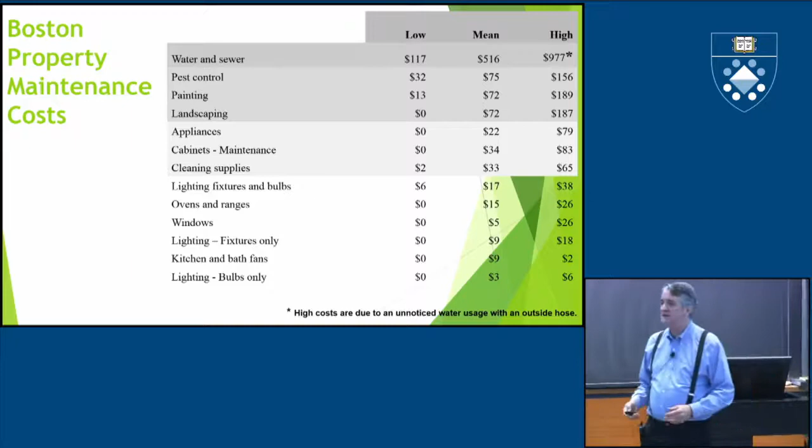And whenever I'm speaking to members of the Republican National Committee, they say, well that's because all these people get all their energy for free. No, it isn't that at all. It has nothing to do with it.

In 1996, I looked at 400 - and I know this seems like a long time ago, but these are still real figures that are pretty close today. In 1996, I looked at low-income buildings across New York State that were multifamily, and they were being improved by the New York State Weatherization Assistance Program.

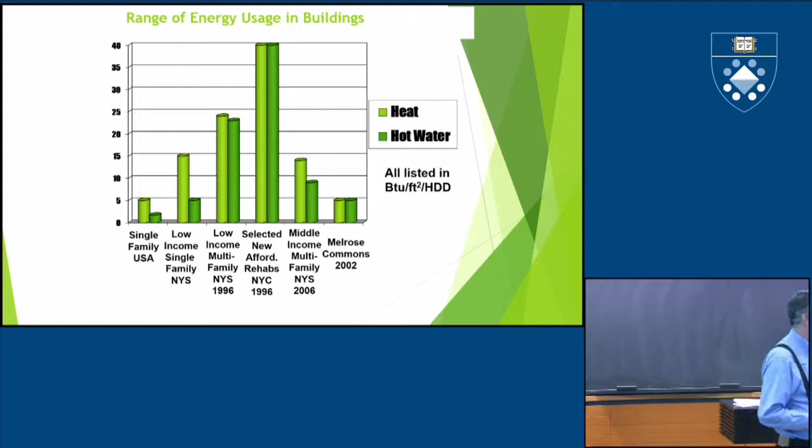A major reason for this is that architects and engineers, as they were building the building, were told by various government entities that they needed to value engineer the buildings. Value engineering means getting something out of the building that's more effective for a better price, but when a government entity says value engineering, they mean take stuff out. So the buildings were under-insulated, there were no controls on the radiators, the boilers were as cheap as could possibly be, and had no ability to turn back the heat at night. That's just some of the things that are wrong.

Today, in middle-income multifamily buildings, the 1, 2, 3, 4 bar over, I find their energy use is about 14 BTUs per square foot per heating degree day, and they pay about 60% for heat and 40% of their money for hot water.

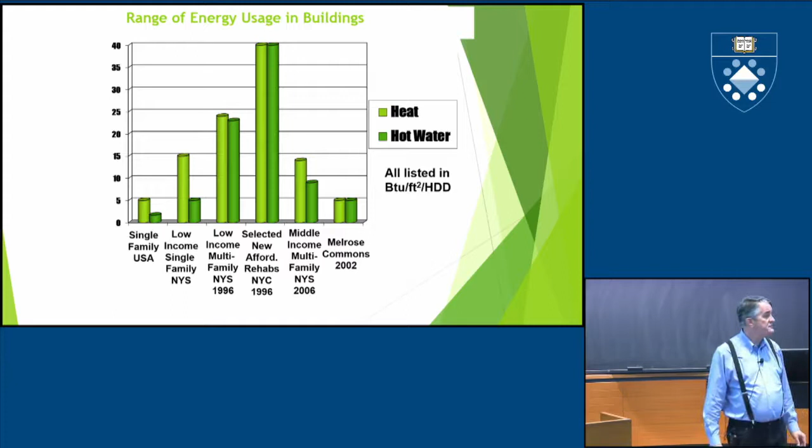But in 2002, I worked with a developer whose family has been in the business for 30 years, and we convinced him to change some things that he did in his building. He built 70 units of affordable housing in the middle of the South Bronx called Melrose Commons. They performed at 5 BTUs per square foot per heating degree day. The builder said they cost him an average of $1.36 per square foot more.

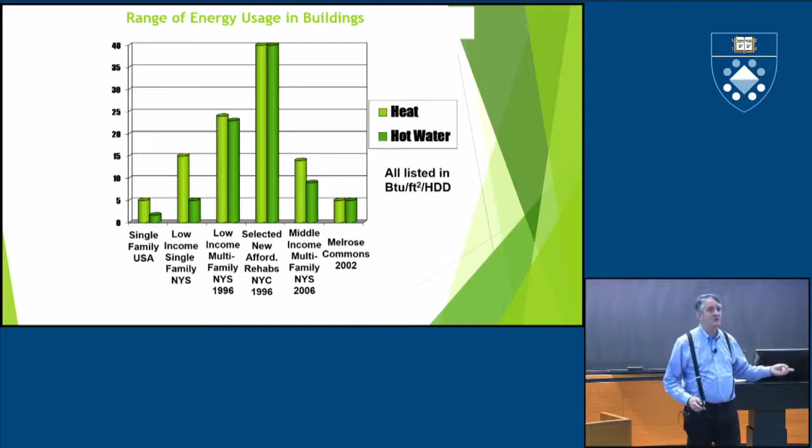This is stuff where logic is really simple. If you look at this chart as BTUs per square foot per heating degree day, and then go back to what the cost of gas was then, this is a difference of between under $1 and over $7 a square foot. This is very common in multifamily buildings - owners don't see how much their buildings cost. As long as the buildings are profitable, they don't understand the cash flow from saving energy.

What does he think I can do for him? So owners actually don't look at this stuff.

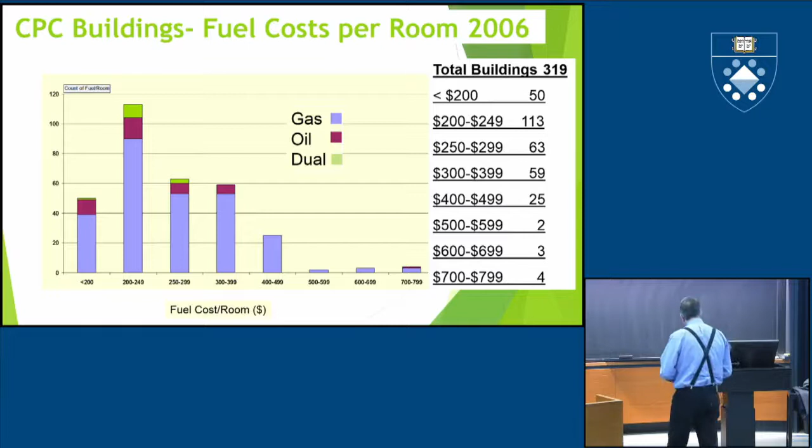This is common because banks have a practice of taking numbers using the PFA method. Would you engineers say what the PFA method is? Plucked from air. That's correct - it's just a wild guess.

These are buildings that are going to fail. Fortunately, in year 10, they brought me in to do a detailed energy analysis of the building, and we've cut the energy use in the building by about 40%.

I've met with people in the New York City mayor's office doing a program for cash flow efficiency, energy efficiency for multifamily buildings, and I said, where's water? They said, oh, we're not doing water. I'm like, water's the biggest cost to building owners, not only in New York City, but in Boston, in Hartford. I actually don't know New Haven numbers that well.

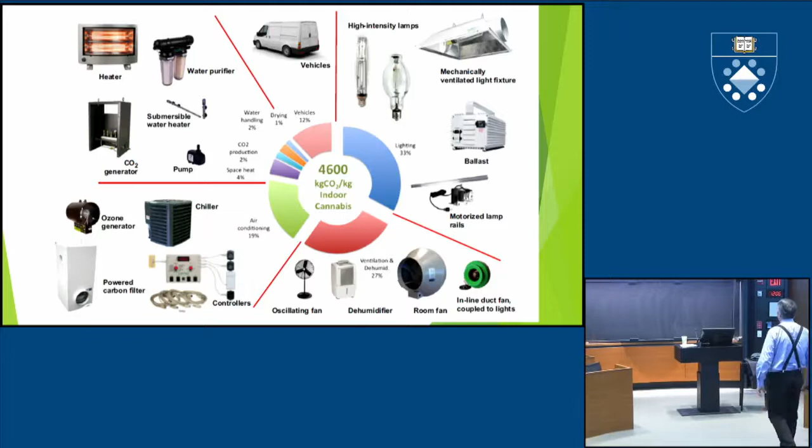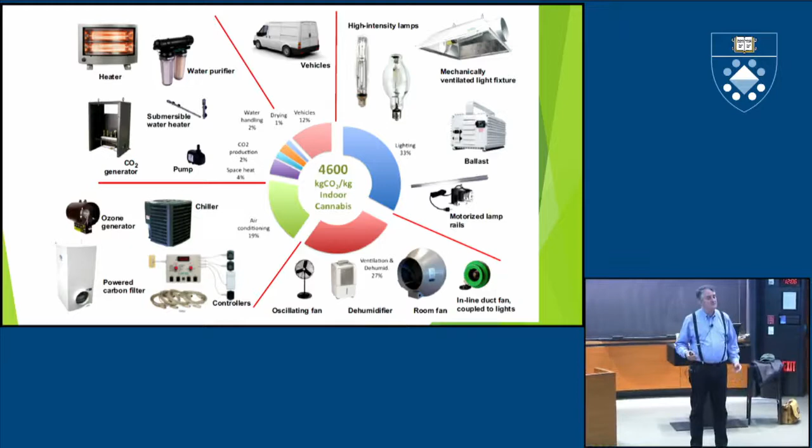Marijuana takes a lot of pumps and air and stuff. I actually talked to a marijuana manufacturer 3 months ago and suggested he change his lighting from fluorescent to LED. And this guy went into this detailed scientific stuff about why LED lights don't work well enough, and they have to get a different spectrum for LED. Anyway, that's pot growing. We don't have to talk about that.

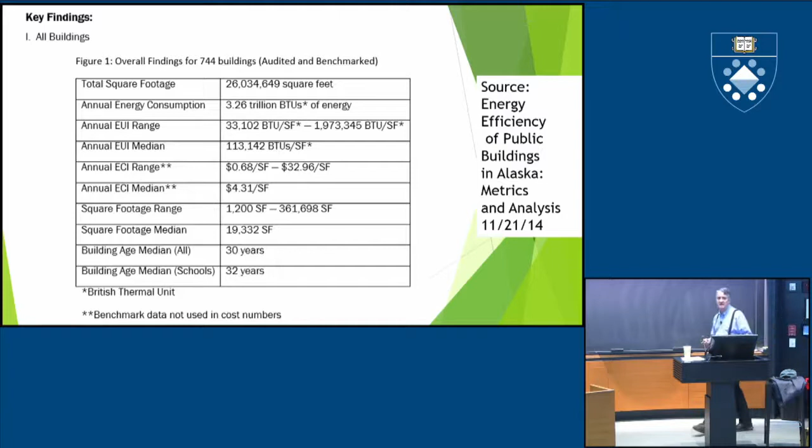Well, if heating is so expensive in Alaska, couldn't we fix it somehow? Well, if they look at it, they find out that the space heat loss by component for all audited buildings - that big blue chart again - is ventilation and air leakage. The buildings leak. They need to be caulked, and the ventilation needs to be fixed.

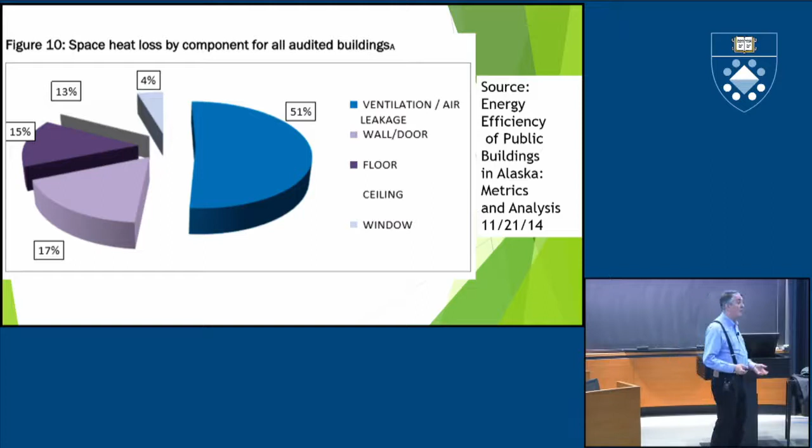It's crazy - it's the same thing that's wrong with all of our buildings. Our buildings leak, we don't make them tighter. Our buildings are ventilated poorly or too much, and we don't balance them. I walk into thousands and thousands of buildings in my career, and technical inefficiency is exactly the same in all of them.

First off, tighten the buildings - increase air sealing and fire stopping. If you say you're going to air seal a building, building owners get scared that their tenants are going to suffocate. But if you tell them you're going to fire stop the building, it's the same thing. And it meets code, and it stops fire from spreading.

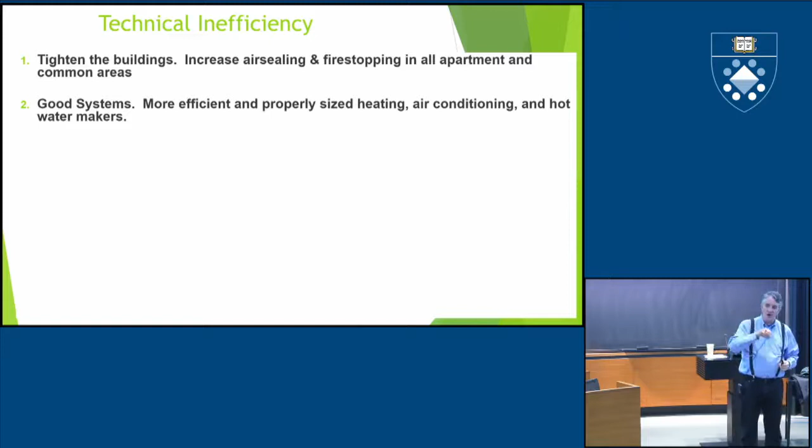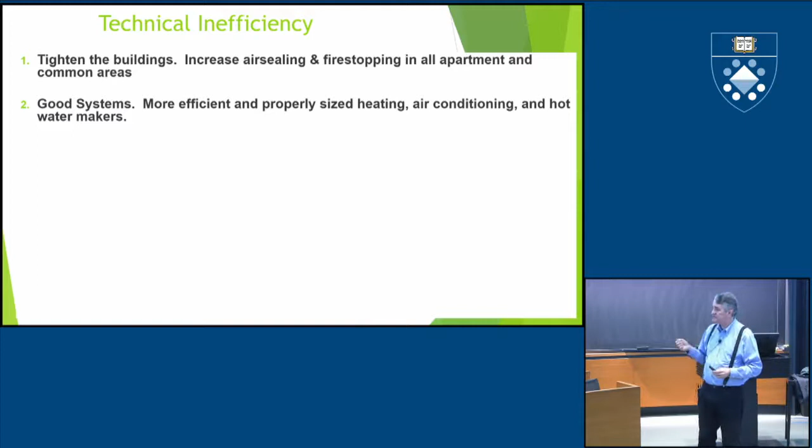In every place in buildings, good systems - why do I hire an engineer, nothing against you engineers, to write a specification for a boiler replacement or air conditioning replacement that's 2 inches thick? The first inch tells me every single code since the beginning of time. The bottom half tells me everything the engineer and architect are not responsible for. And in the center, there's one piece that draws the basement, shows a box and a circle, and says put boiler here, put hot water heater here, replace with same. That's like taking your iPhone and changing it into a dial phone. It's backwards - don't replace with same.

Upgrade the building controls. If you walk by a building and all the windows are open, the building's overheated, so you have to fix that.

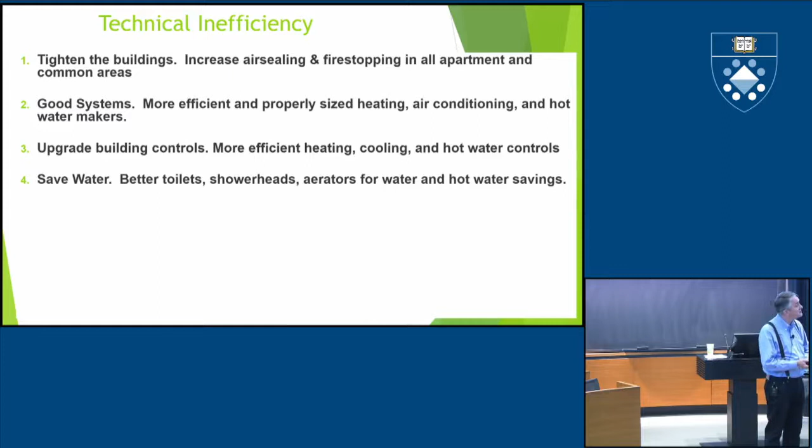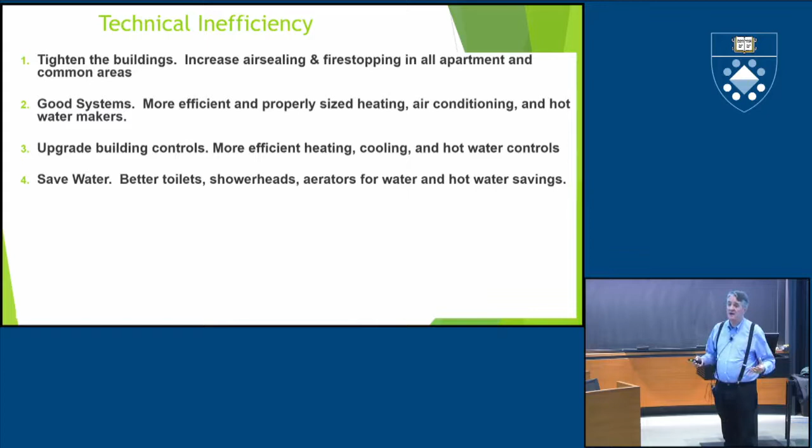Save water - I was very impressed. I went into the bathroom here, and the bathroom sinks are running at a little under a gallon a minute. That's really good - most bathroom sinks in most LEED buildings run at 2.5 gallons a minute, which typically makes water splash on the floor and in your face. Shower heads are 5 gallons a minute - it's like the water's all over the place. I'm a big guy, and I can't get 5 gallons a minute on me when I'm in the shower no matter what. We catastrophically waste water.

Toilets are the big waster. Fix the ventilation systems - they're big, they suck a lot of air out of the building. On the bottom floor of an apartment building, they draw 7 cubic feet per minute; on the top, they draw 140. We want to balance them at about 35. There's an easy way to do that.

Brighter spaces - let's get better light. The guys came in here today to show me this space. There's mostly LED lights in here, but there's halogens where they don't need to be, and the lights aren't dimmable. What the heck? This is a performance space - this should be a little more controllable.

And I love that this building has a lot of daylighting. That's very nice. I don't know if the exterior glass is high efficiency, but there's a lot of daylighting here.

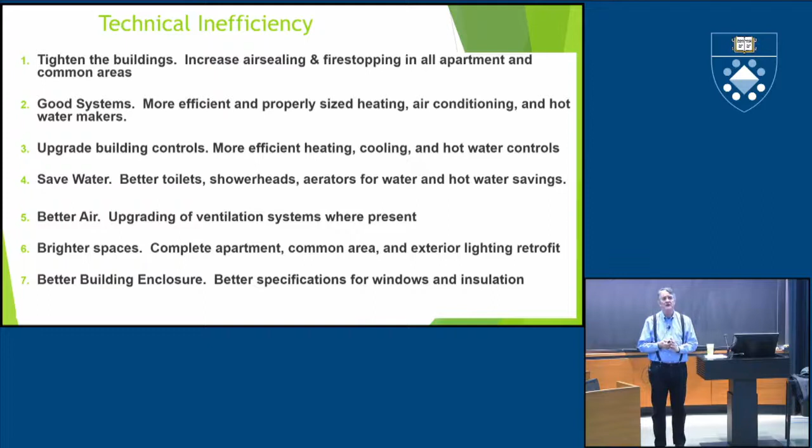Better building enclosures. Specify better windows and insulation. You can't just say to insulation, place fiberglass in walls. No, you have to have an actual way how to do it.

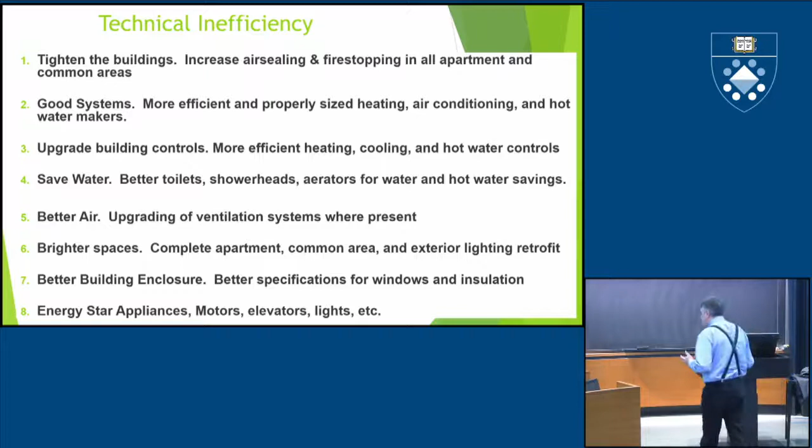And this is the easy thing, Energy Star appliances, motors, elevators, and lights, but there's 2 things that are even more difficult to get done, and this is psychology-related stuff.

Owners don't get help from building professionals. They listen to their cousin Vinny before they listen to anyone. And this is a big mistake. They listen to a contractor.

Windows will save you 40%. Let me explain something to you. Unless a building doesn't have windows, windows won't save you 40%. I've never seen a job where windows saved more than 5%. Okay? So you need help.

Talk to people, and get everybody together in the same room. The super, the manager, everybody else. And then talk to your peers that can help. Start looking at the programs before you do this big retrofit or before you build a new building. Get the team together. Where is the money available? What money can I get to do this?

Okay, now move. So when you talk to building owners and decision makers, if you want to really convince them of something, take them outside their building. Walk them around. Ask them to pretend they don't own or manage it.

And they'll suddenly see open windows in their building. And they'll say, those stupid tenants. It's like, it's not the stupid tenants, it's the stupid owner. You're overheating the building, and that's the only way they can turn it off.

Look around and point stuff out to them. Thank you for that. And what's that? Thanks. Oh, now the building owner in the crowd is like, hey, I should really do this.

And all owners don't speak that way, I'm sorry. And I hate the expression think outside the box, but I was with an energy service company the other day, and all they wanted to do is the same old thing. And I said, we can do something really easy, and it'll be cheaper. We can change, I won't get into the technical stuff, but they were like, wow, that is a lot easier.

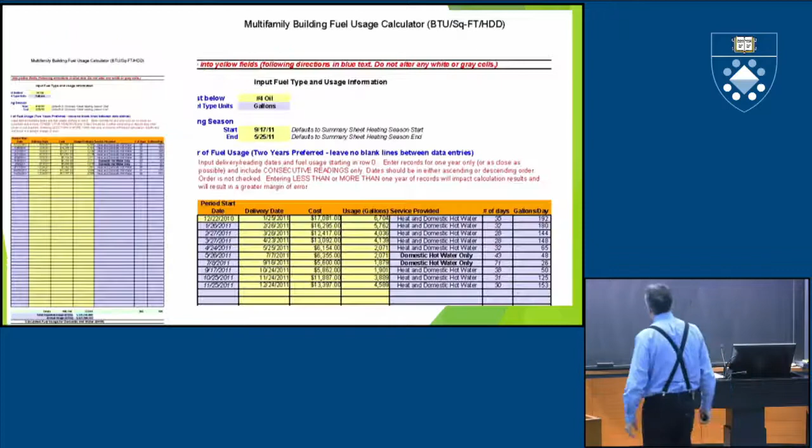Make it easier on me, I can make it easier on the owners. So in this very blurry graph that people don't like, we entered the fuel usage in the building. This is gas or oil. We entered the electric usage in the building.

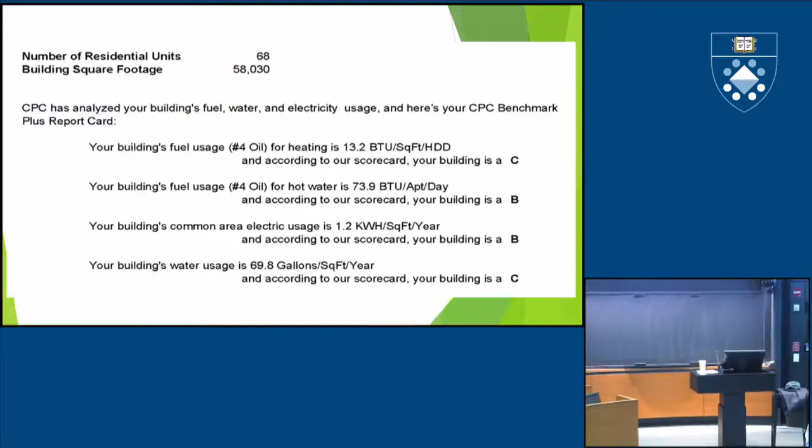We entered the water use in the building, and out popped our fancy little spreadsheet comparing it to every other building. Your building's fuel usage for heating is a C. Your building's oil usage for hot water is a B. Your building's common area electric use is a B. Your building's water use—we gave owners report cards.

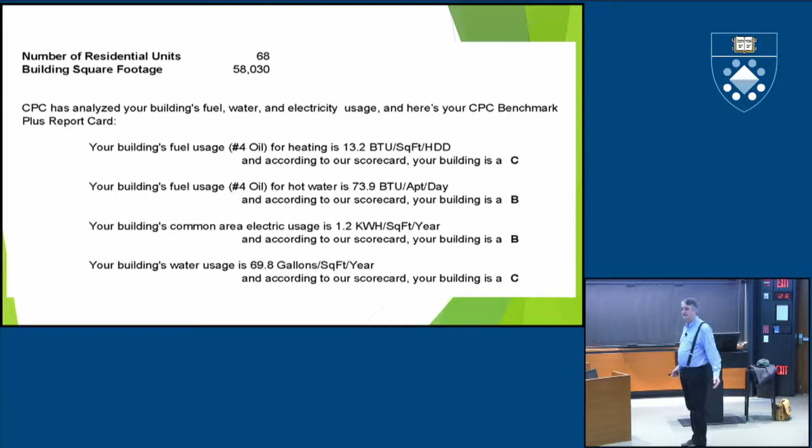Buildings that are retrofitted for energy efficiency as part of refinancing can save energy if we target excessive usage and retrofit accordingly. Why don't we do this as part of a retrofit? Why don't we do this as part of refinancing? When we're refinancing the debt on any building, why don't we say, what are the big energy costs and can we reduce them? But the problem is bankers say energy costs are going to go up 3% per year in every building.

I took a commercial banking class at NYU, one of your sister organizations, and a banker with 40 years of experience—I asked him, is it possible that while refinancing the debt on the building, you could retrofit it so it uses less energy? And to a classroom of 30 people, he said, no. It's not humanly possible to save energy in buildings, if you're a banker. Frightening. This is frightening.

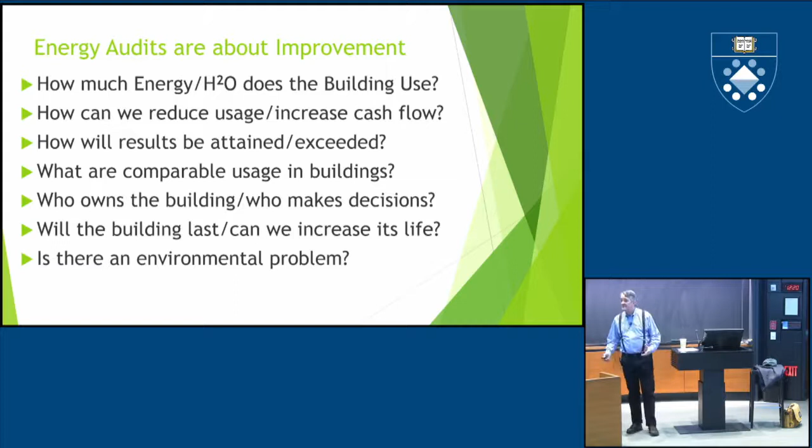If you want to get kicked out of a banker's office, tell them, you just don't understand this—you're doing a retrofit in a building, it's a deep energy retrofit, it's LEED, it's Energy Star, it's Passive House, it's green, I'm an expert.

We did a blower door analysis in the building at CFM 50. If you know what that means, that tells you how much the building leaks. We're dense packing the walls.

These are all things that scare people. Oh, we're air sealing the building in the attic. Yeah, a banker thinks you're going to suffocate the clients. This is really good. Or tell them we're doing a deep energy retrofit of the building, adding 4 inches of exterior insulation. Or maybe we're dense blowing the walls. We're moving a much smaller boiler to the roof and making it a condensing boiler. We're air sealing the apartments and the roof cavity, and we're reducing the water flow in the toilets, showers, and sinks.

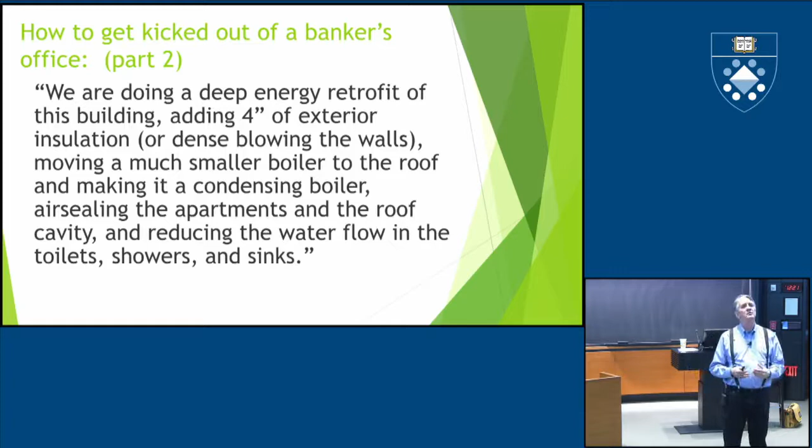And the response from the banker is going to be this. They don't want any technical terms like that. They don't want that - the guy that owns buildings over here is shaking his head, yeah, my owner said the bank has said that to me.

But if you break it down and just say, we're refinancing the debt on the building, we're upgrading the fire stopping throughout the building - oh, it's not air sealing, it's fire stopping. We're replacing the wall and roof insulation that has surpassed its useful life. Now you're talking to them.

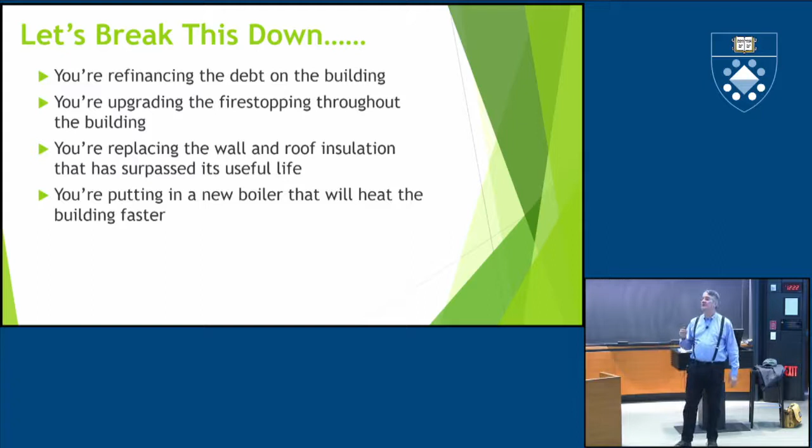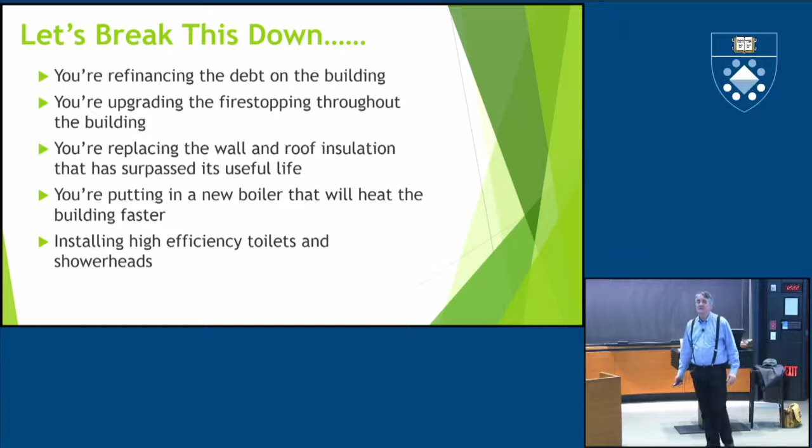We're putting in a new boiler that will heat the building faster. Don't say high performance, don't say condensing, don't say smaller. Just tell them, simple. And we're installing high efficiency toilets and shower heads. High efficiency, that's all. And we have plans, and we have specs, and we have an architect, and we have an engineer, we have a project manager, and we have 3 bids. Bankers love you. They love you then, as long as you talk their language to them.

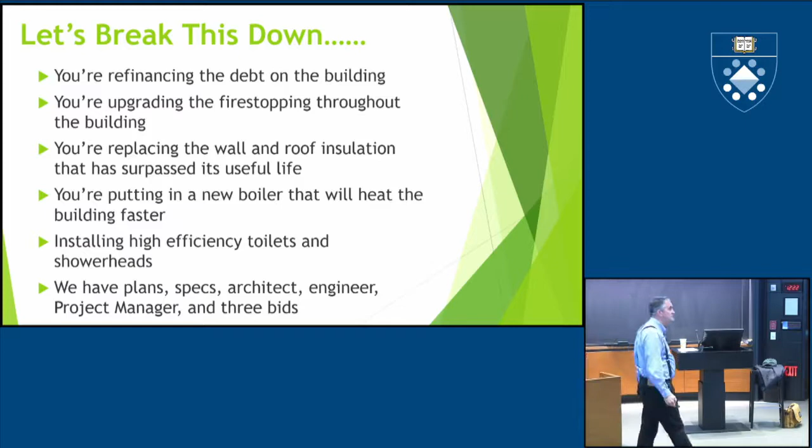Well, I'm going to run through the economics of doing this. So if you have a 20-unit building that's got $1,000 a month rent, that building pulls in $240,000 a year. But the expenses will be about $4,500 per unit. The taxes will be $2,500 a unit. The total expenses are $140,000. That means the net operating income, or NOI, is $100,000 because 240 minus 140 is $100,000. Okay, so there's your net operating income.

But the property mortgage is currently $1.2 million. If you look at the debt coverage ratio, you take the $100,000, you divide it by 1.25, and they're able to borrow $80,000 a year. Divide that by 12, it's about $6,500 monthly payment. That's a 30-year loan at 5%. Cash flow is about $20,000 per year. Okay, these are all up on the web afterwards, but I just want to run through them.

But underwrite the savings into the first mortgage. The expenses are $90,000, say 35% are for utilities. Project 20% savings - that makes an additional monthly payment of $525. You add that to the 30-year first mortgage at 5%. That's $98,000. It's very simple. It blends things in, and you have better cash flow.

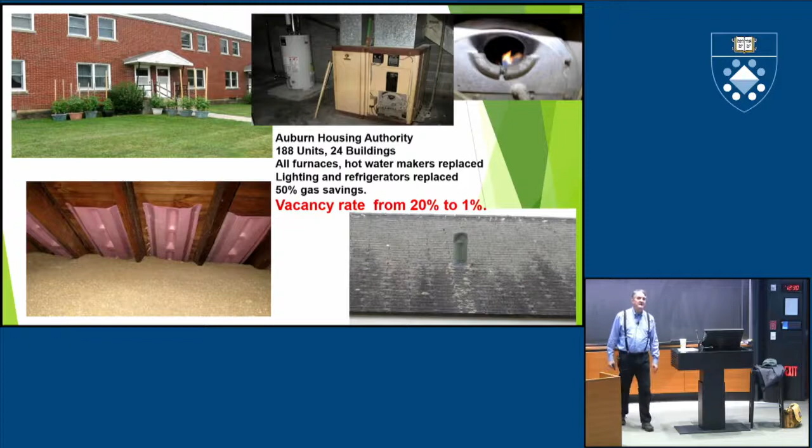This is the Auburn Housing Authority. It's 188 units, 24 buildings. Those of you that have studied architecture can see from the buildings on the upper left-hand corner, this is called Early Modern Eisenhower Bomb Shelter. It's very prominent architecture from the 50s and 60s.

We put in new furnaces, new hot water makers, did lighting and refrigeration. Look at that number underneath there - it says 50% gas savings. The executive director of the Housing Authority wrote a two-page thank you letter to us. You don't get those too often, saying you guys did a really good job.

But the big moneymaker on the building - word around Auburn was, hey, Auburn Heights fixed up their building. Their vacancy rate went from 20% to 1%, increased their cash flow, and increased their rent. That was a good thing. We made them a lot of money.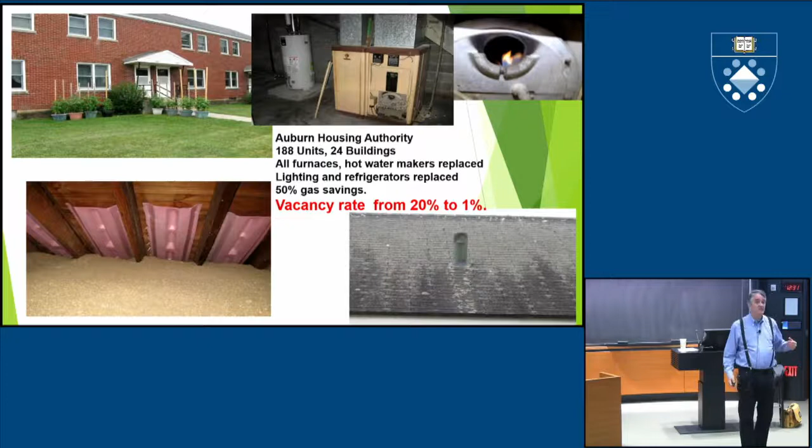This is a historic building just south of Albany, New York. It was an engineering school built in 1873 by a Wall Street person who didn't know anything about running an engineering school, and it promptly went under. Kids who live here, people my age in this town, all went to grade school in this building. It's absolutely glorious on the outside.

It's been changed to senior housing, and when it was changed, nothing was done with the retrofit. The attic was somewhat insulated, the boilers were crappy, to say the least. All we did was put attic insulation in and air seal it properly, change the heating and domestic hot water systems, and we got 20% savings.

But this is a historic preservation building, and the historical preservation people didn't come after us. They didn't say a word. That's a really hard thing to do in historic preservation buildings - keep the historical preservation people non-hysterical. It worked. This is what you can do with a good energy retrofit.

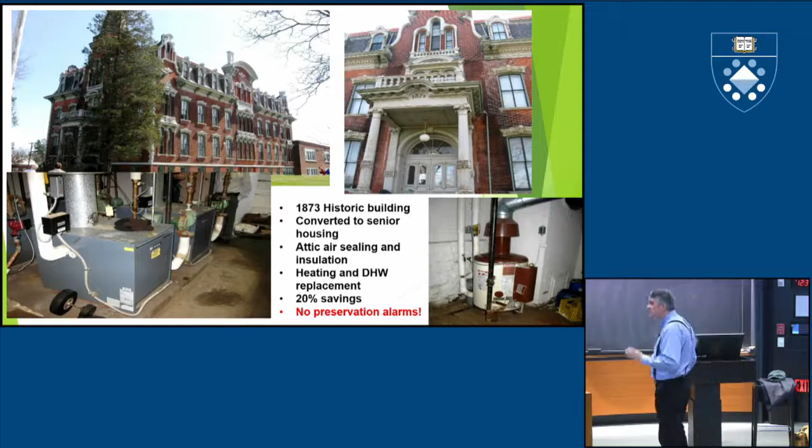This is a classic New York City five-story walk-up building, nothing fancy. Mod rehab - we did what's called a checkerboard rehab, did one line at a time. So we did the boilers, but apartments were air sealed. They got new windows, better insulation in the walls, better controls on the boilers.

The oil usage declined, weather adjusted, by 63.7%. The average savings per apartment in oil alone, not electric, was over $2,100 per apartment. And the retrofit cost $4,000 per apartment.

We got government money through the New York State Weatherization Assistance Program, so it made it super cost effective. This is from an owner who told me, I don't use that weatherization stuff, it's a bunch of crap. Now he loves the weatherization program. Really good - this is also the best weatherization program in the United States. It's run by a guy named Dan Reber, called the Northern Manhattan Improvement Corporation.

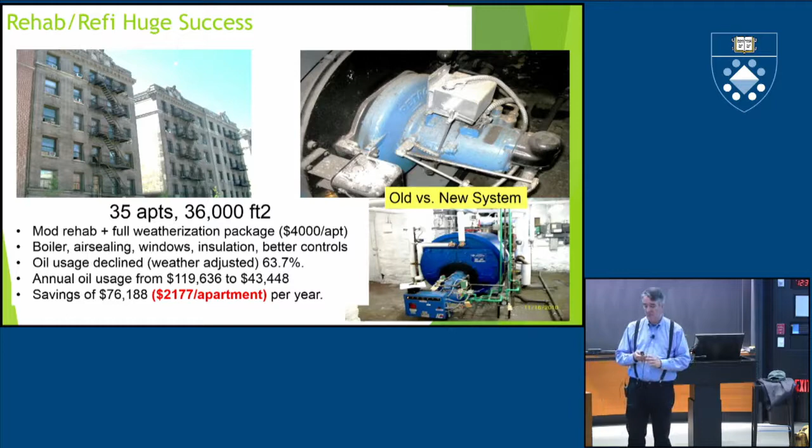This again is upstate New York between Rochester and Syracuse. This is an all-electric building. Back in the 60s, before all you guys were born, the head of the Atomic Energy Commission said atomic energy is going to be so cost-effective, soon electricity will be too cheap to meter. Those are his exact words. So they built a lot of all-electrically heated buildings all over the country.

These tenants are paying for their own electric heat, individually metered. So we went in and tightened up the apartments - that's all. We put a blower door in the apartments and tightened them up, made them more cost effective. The average apartment we tightened 24%. It's still pretty leaky, but their electric bills went down 25%. These are little old ladies.

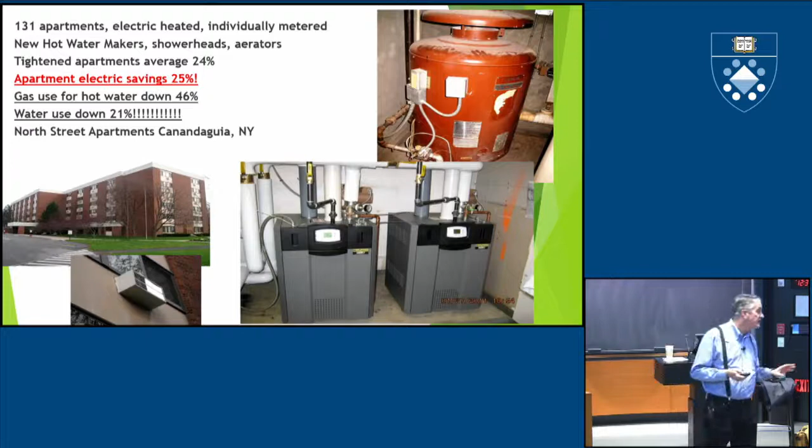That's a good deal. The gas used for hot water, just by changing shower heads and aerators and putting in new hot water heaters, the gas use went down 46%. But shower heads and aerators alone cut the water bill by 21%. These are seniors - they don't use much water. This is big money, okay?

Last week I went to a building and found this toilet. The apartment was vacant, and I had to pee. So I closed the door to the bathroom, and I peed. And I washed my hands - yes, I washed my hands after I pee.

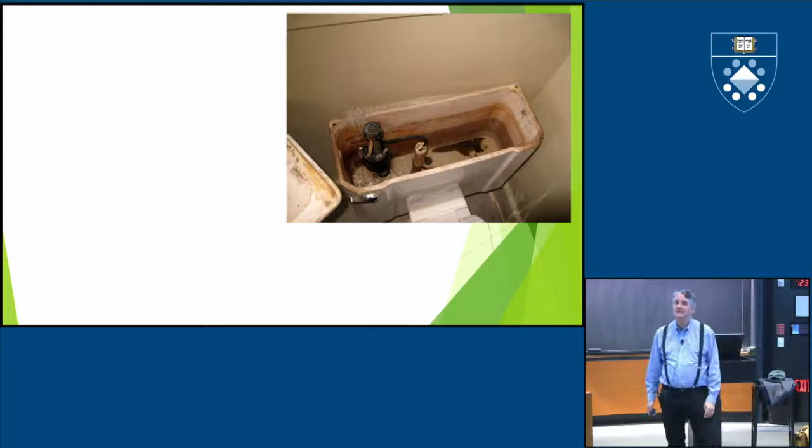I flushed the toilet, and while I was looking at the rest of the apartment, the toilet was running constantly because the flapper valve was broken, running and running and running. I bent over and fixed the flapper valve, pushed it back down, and then looked at the toilet. If you pick up the lid to a toilet, you can see the date it was manufactured. Happy 58th birthday, toilet. What the hell? This is crazy.

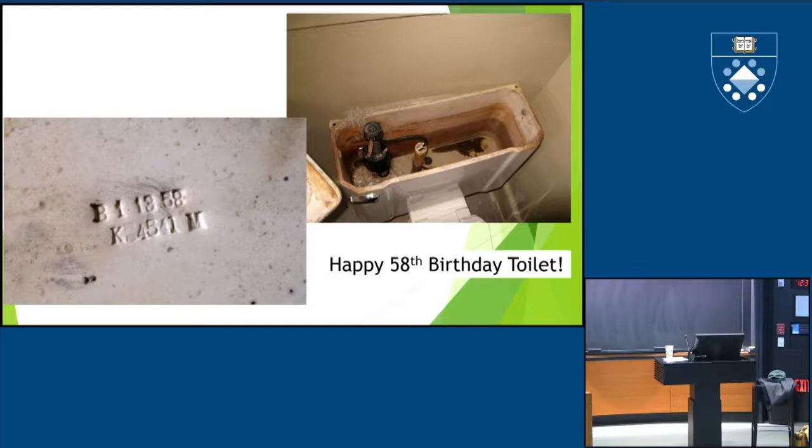This is a building I'm very familiar with. The owner said the costs in my building for water are terrible. Obviously, there's leaks in the building. And I'm like, Al, it's not the leaks.

It's your toilets. Your toilets are crappy, no pun intended. He changed the toilets to the 1.1 gallon per flush type that doesn't have a flapper valve. It's called a power flush toilet, makes a zoom noise when you flush it. His water use went down 40% in one month, just from toilets.

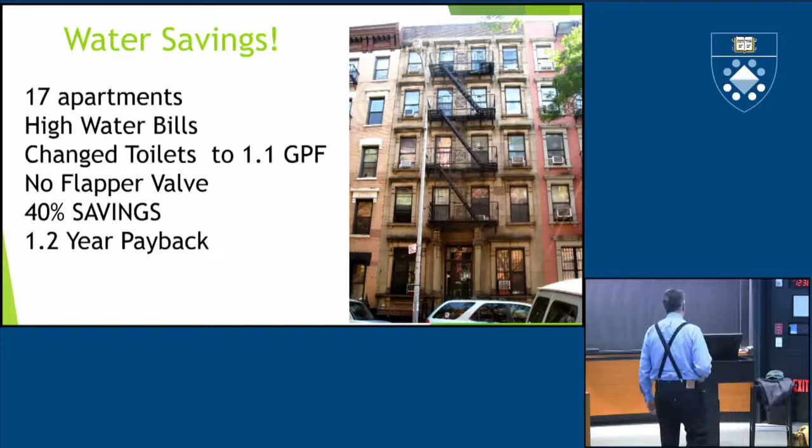When he told me beforehand, no, those toilets don't work, my plumber told me so. I'm like, how old's your plumber? He said 84. This is the advice people are getting on energy efficiency. 1.2-year payback on this building.

It took 6 months. At first, I didn't think we could get anywhere - I thought, old building, pig. No, old building, super efficient. The management company was very, very good at what it did. Also, the building had been painted 500,000 times, which tightens up the interior of the apartments so they don't leak as much. So the apartments are tight and everything's pretty good.

The management company got the number right. Look in this room - there's 2 types of lights, and out in the hall there's probably 6 more. In an 11,000 unit building, they have only 6 types of fixtures. That reduces maintenance and increases your ability to buy bulbs in bulk and get a better price.

It's not just how good the building is, it's how well the building is managed. Many times a building that is not so good is not so good because it's not managed well. I don't find that to be the case that a building is just inherently built like a piece of crap. You have to train your staff, tell them what you want done in the building and what results you want, and then you can do better.